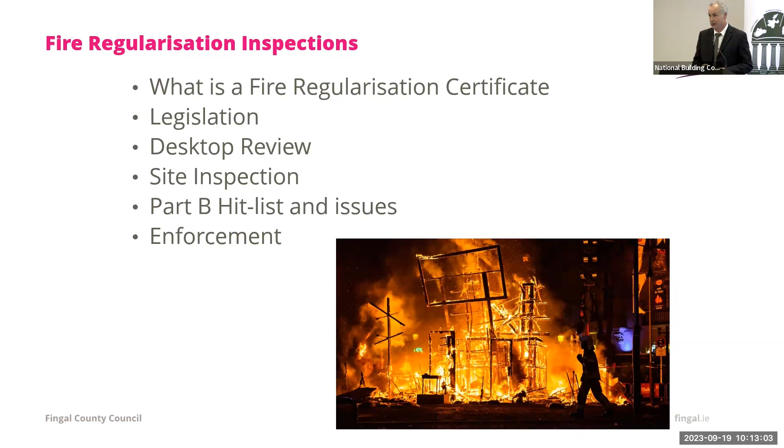What I'm going to go through today: I'm going to talk a little bit about what a fire regularisation is. I'm going to touch on the legislation, because the legislation underpins everything. With every inspection, we generally do our desktop review, then we do the site inspection. I'm going to throw up a few Part B issues that we've seen during fire regularisation inspections, and talk a little bit about enforcement.

Is fire safety important? Yes, fire safety is really important. This is probably one of the more recent big fire kills, in South Africa, and it was only there at the end of August. So, 70 people were killed in that fire. There were more than 200 people in the building. It can happen at any time.

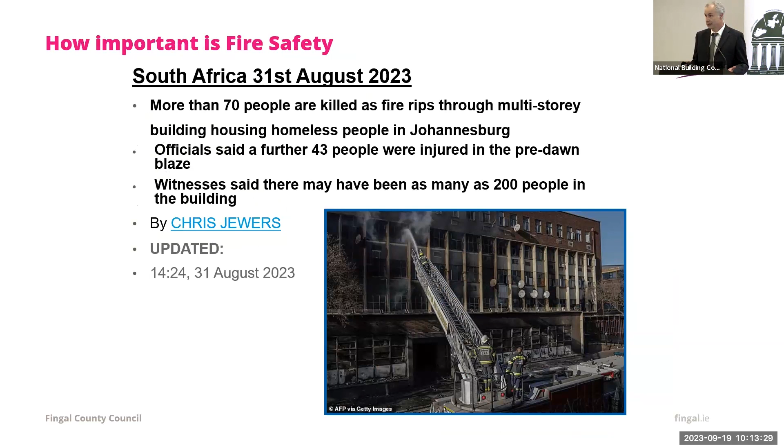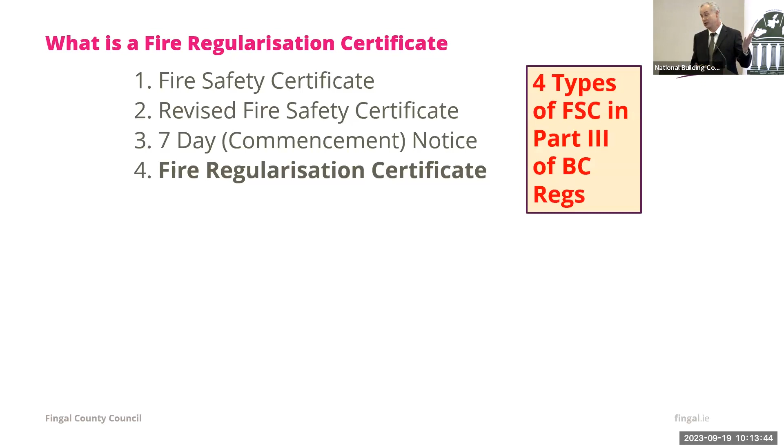So the buildings must comply with Part B. There's 4 different fire certs mentioned - well, there's actually only 3. There's 4 mentioned under Part 3, but the 7-day notice is a commencement notice. So really that's just a commencement notice saying that we want to start in 7 days and we've already submitted our fire cert. So there's only really 3.

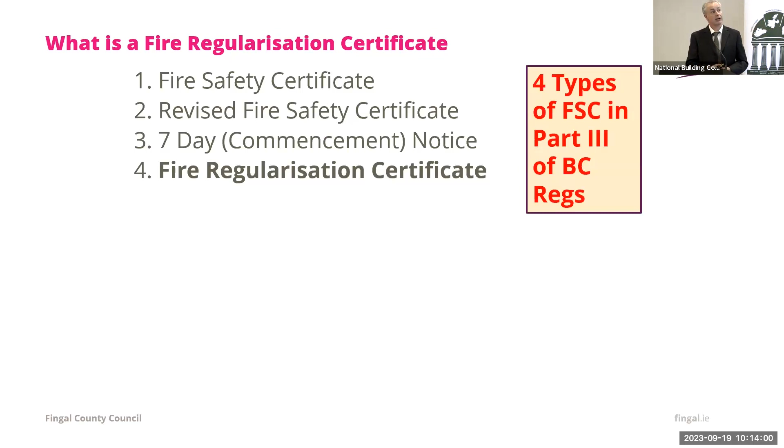There's the fire safety certificate, the normal one; the revised one, where something changed and you need to get a revised certificate; and then the fire regularisation certificate, which is granted by the Building Control Authority in respect to works on non-domestic buildings and apartment blocks which were commenced or completed without the necessary fire safety certification. And with every fire safety cert, it's granted with conditions, or refused.

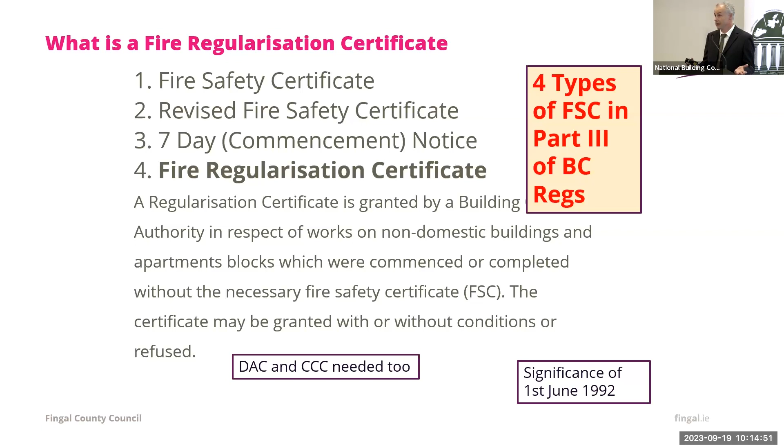Just as an aide-memoire for me - obviously every building needs a DAC, and every building should run through BCAR as well. And everybody knows this, but just to reiterate it: the legislation came in on the 1st of June 1992 for fire safety certs. Fire regularisations came in in 2009, but anything built before 1992 does not have a fire safety cert. So in reality, anything built before 1992 that needs a fire cert would have to go through the fire regularisation process.

Just a quick note on the general legislation: fire safety certs only look at Part B. So that's it, Part B only. We don't look at anything else as part of a fire safety cert.

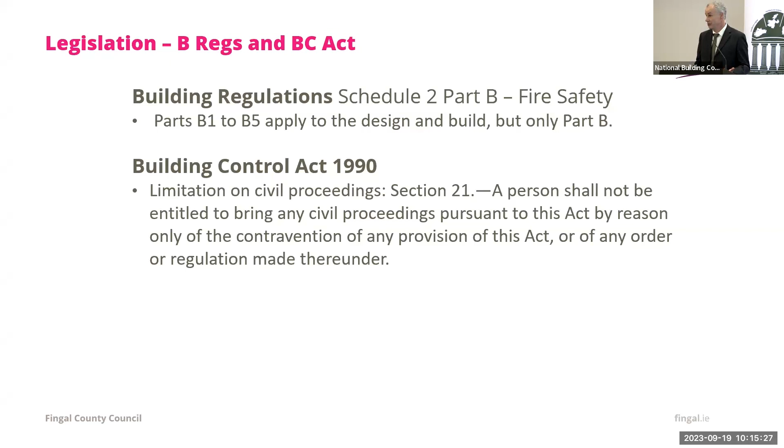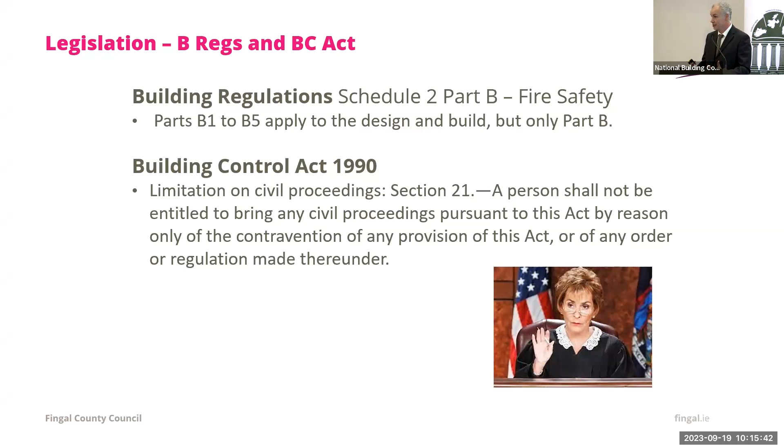I threw up Section 21, which is the limitation of prosecution against the local authorities. Basically, you can't be prosecuted under the Building Control Act for the work you do as part of a Building Control Authority. It's never been tested in court, but I don't want to be sitting in front of Judge Judy arguing the case - the legislation is written to protect us so that we can assess fire safety applications, carry out the inspection, and give our best advice with our best ability.

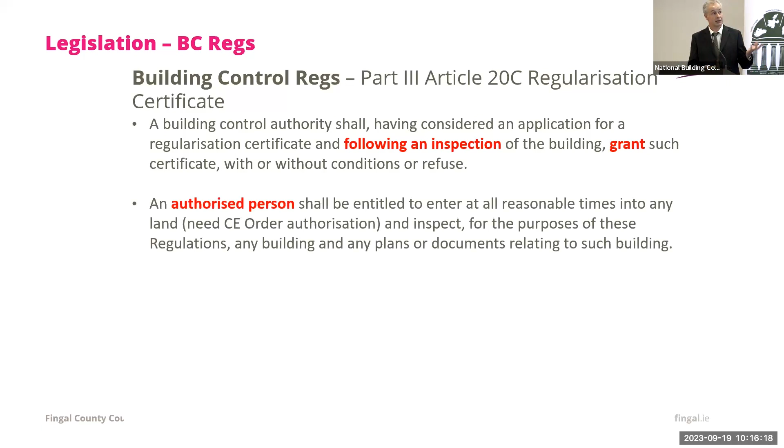The actual regs - drilling down into the regs in Part 3 - this is what it says about fire regularisations: following an inspection. Every fire regularisation needs an inspection. The legislation says it: following an inspection, the Building Control Authority can grant with or without conditions, or refuse. It's the inspection. And when the Building Control legislation says 'authorised person,' they mean the authorised person under Section 11. So that is the authorised person that carries out the inspection - you have to be authorised under Section 11.

The regularisation certificate granted on this basis says - in the opinion, which is a term that was used before BCAR - in the opinion of the Building Control Authority, the works will comply with Part B. So the design is assessed normally by the competent building control people, and then you carry out an inspection, and in the opinion of the building control officer, the design and the works comply with Part B.

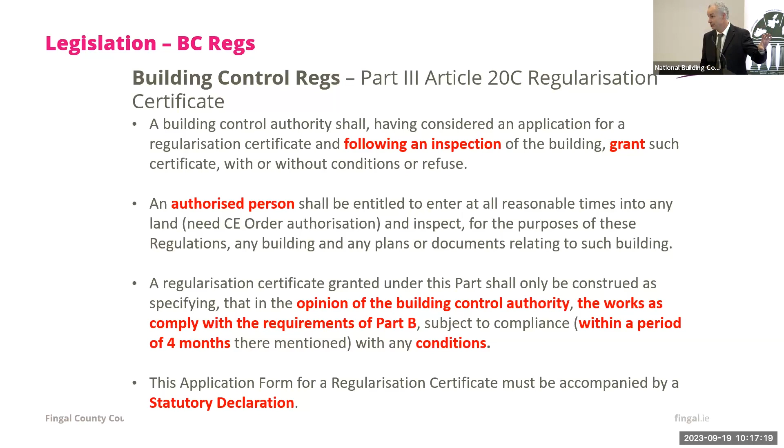If you put conditions on a fire regularisation, there's 4 months for the owner to comply. They have to comply within 4 months. If they don't comply within 4 months, the fire cert is no longer valid. Now that's quite stark, and it puts a lot of onus on the Building Control Authority. But every fire regularisation comes in with a statutory declaration, and the statutory declaration puts an awful lot of responsibility on the building owner.

They solemnly swear that the documents and information, as the building is constructed or the works carried out, are true and fully in compliance with Part B. So they're saying that the drawings they gave you and the works that were carried out are in full compliance with Part B. They've sworn it.

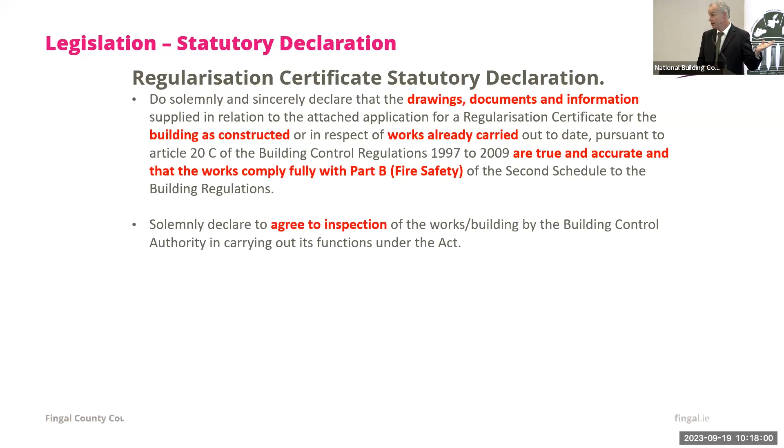They've signed the statutory declaration. You're talking about the Criminal Justice Act by falsely signing a statutory declaration. So you're into a whole new area at that stage. They solemnly agree to allow you to do the inspection, so they can't refuse. If they refuse to do the inspection, it's a breach of building control.

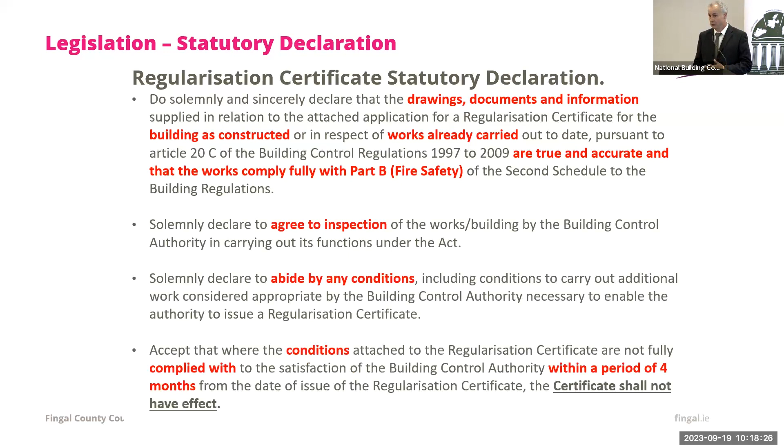And it's a breach of the Criminal Justice Act. They solemnly declare that they will abide by any conditions, whatever condition we put on it, and accept that the conditions put on it have to be complied with within 4 months, otherwise the certificate will no longer be valid. So the legislation is quite strong on this, and it puts an awful lot of onus on the builder and the owner.

Like I said, fire regularisations, every fire safety certificate, only looks at B0 to B5 really, because there's bits in B0 as well.

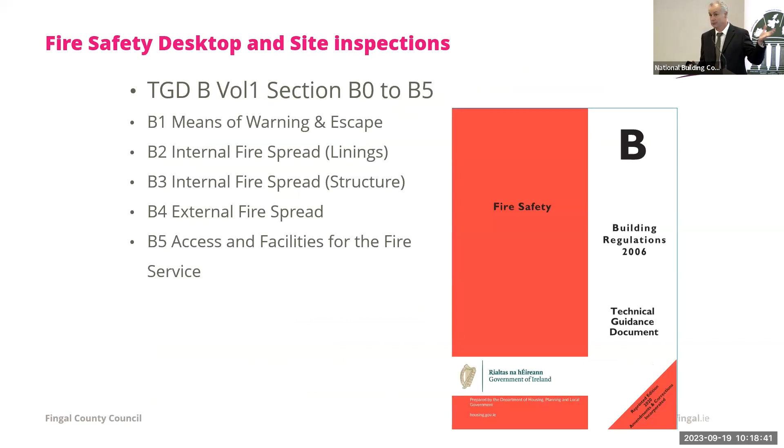What should an application include? Now, as part of the desktop assessment, there is information that will come into you, and the legislation says this is the information that must come into you. So it must be enough information to enable the Building Control Authority to assess whether said works will comply with Part B.

So you should have, through the assessment process where the fire safety certificate has been assessed and deemed that the drawings and the compliance report are in compliance with Part B, you should have an awful lot of information. So when you come to do the desktop review, you have all this information.

So you have the completed application for the fire safety certificate, which gives you contact details. You have the plans and the drawings. You have the compliance report. So you have all the information which shows how this building complies with Part B.

You have the particulars of the nature and extent of the proposed building, or the proposed use, or the proposed change of use. The fee is not important for us - we have a job to do, it doesn't matter to us about the fee. By the way, the fee is 4 times the normal fire safety cert.

And the person that carried out the assessment will or may have already put in conditions that will be applicable on this, so you have the conditions. For Fingal County Council, Dublin Fire Brigade carry out the actual assessment, and if they come across concerns, they will put conditions in based on their assessment. If there's a lot of conditions in, you can be sure they had concerns about that particular builder.

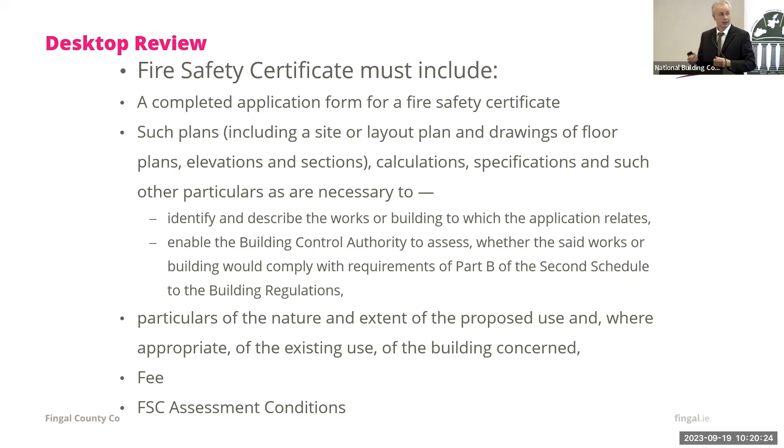So what do you get? The application form, the drawings which show how it complies, and the compliance report - a very important document. The compliance report will match, or should match, Part B, and you can see through it how this matches up with Part B. You'll also get the recommended conditions as part of the fire safety cert assessment, from whoever carried out that assessment.

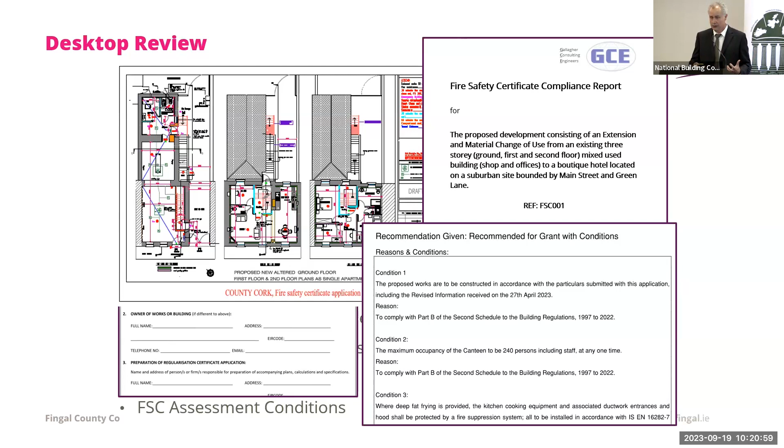So you're going to site with a lot of information already. If you have a look at this before you go to site, you have a lot of information in your head. Then you go to site for the actual inspection. Now, I've made this very simple, but I'm going to talk about it in more detail. Really, it is simple: you contact the consultant, arrange to go to site, meet the consultant on site, and carry out your inspection.

Based on your inspection, you have 4 choices. You can tell the consultant, the builder, the assigned certifier, or the owner, depending on who you meet - generally it's the assigned certifier or the consultant that did the fire safety cert - that they need to fix anything you find on site, and that you'll come back again.

And that will mean extensions of time. It will mean a second visit, third visit. It's laborious. It's the way we do it in Fingal a lot of the time, whether it's because we don't trust them, or generally if there's small works to be done, just get the works done and we'll come back and check it again.

The second thing is the building is perfect. Everything matches the drawings, everything seems to comply with Part B. Happy days - grant with the fire safety conditions, the conditions that the person who assessed the fire safety cert put in.

Just grant with those. Third one, we could grant with the assessed fire safety conditions and any other conditions that came from our site inspection. So, you know, the door didn't have intumescent seals, or we had a question mark about certification on a particular product - we can build that into the conditions. We can say that all doors must comply with Part B and they have 4 months to get that right, and then we can carry out another inspection on that basis.

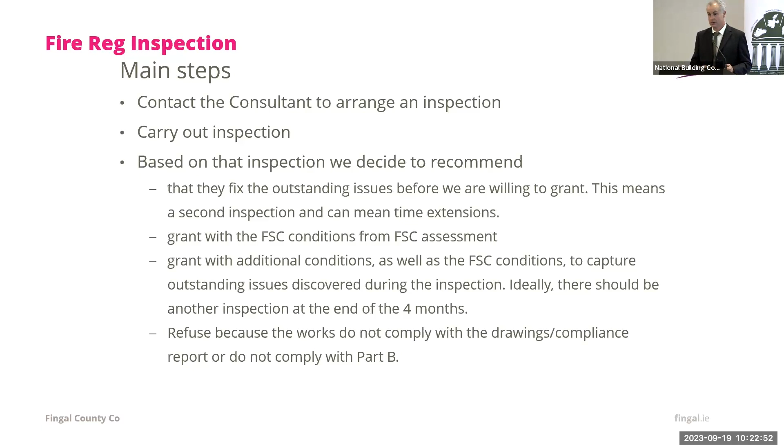And refuse. So obviously, if we refuse, we refuse. If it's not compliant and there's no way to get it compliant, it'll be a refusal.

So the actual inspection - like I said, have your data, do your desktop review, have your drawings, have your compliance report. Bring a camera, simple, bring a camera. Most people have tablets now - like Mairead said, my guys have tablets - so the camera is already built in.

You might have to request documentation during an inspection. For example, if the drawings don't show where the smoke detectors are meant to be, you ask for the commissioning cert for your fire detection and smoke alarm. Simple as that - you could ask that during the inspection. We're entitled under Section 11 to ask for any documentation to show compliance.

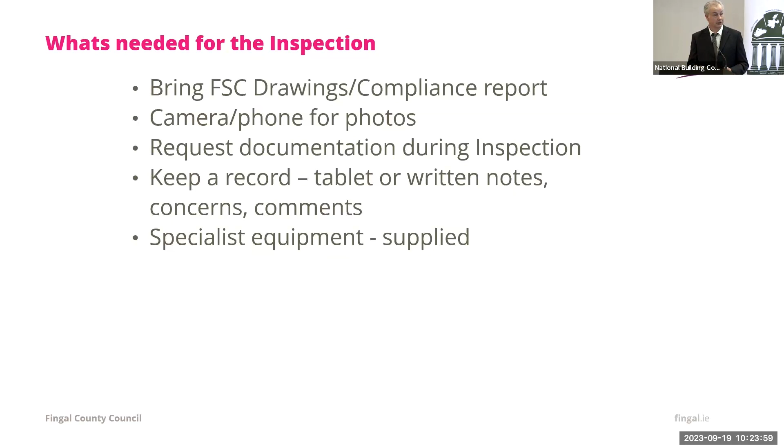Keep a record, obviously keep notes as you're going through. Specialist equipment - you shouldn't need specialist equipment, unless you're going to get them to turn on the emergency lighting and check the luminance of that. But you shouldn't need special equipment, and if you do, it should be supplied by the consultant. If you need to get a ladder to go up and see something, it should be supplied.

I did an interview about 2 years ago, and I had an architectural technologist on the other side of the table who was working in the business for 30 years and said he never saw a building control inspector on site. I was shocked. They probably were on site, probably on lots of his sites, but nobody knew we were the building control officer. So I would highly recommend getting a vest that's marked - it brings professionalism into it, it brings it up that level.

I always bring the red book with me. Sometimes they would laugh when I walk in with the red book, but when the row breaks out, I give them the red book and say, show me how that complies.

When do you terminate an inspection? Well, if the works aren't done, you can finish the inspection and find all the works that are not done, or if you walk in the door and the very first thing is works non-compliant, you can walk straight out that door and say, get it right.

The consultant hasn't visited the site - the builder told them it was all finished, and they took the builder's word. No show, consultant doesn't turn up - that's awkward enough. Whether that's refusing you entry or not, I don't know, but generally it's a mistake.

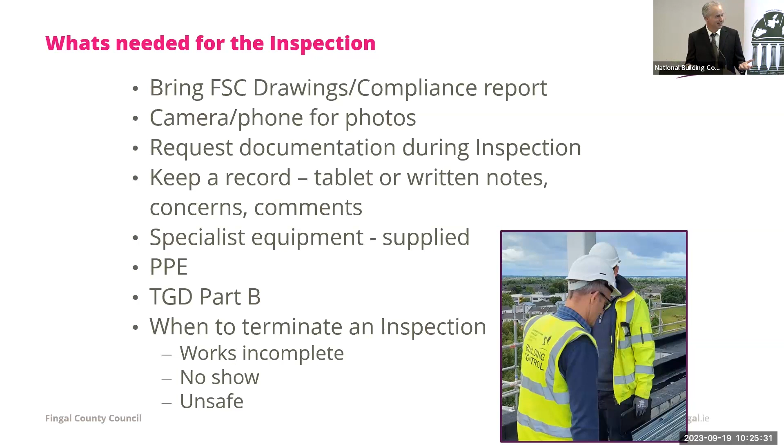The building is unsafe. Obviously, don't go into a building that's unsafe.

Okay, the actual inspection - what do you come across, what do you look at? Fire doors, big one, always trouble, particularly in older buildings, very difficult with older buildings. But look for the basics - make sure it's not lockable.

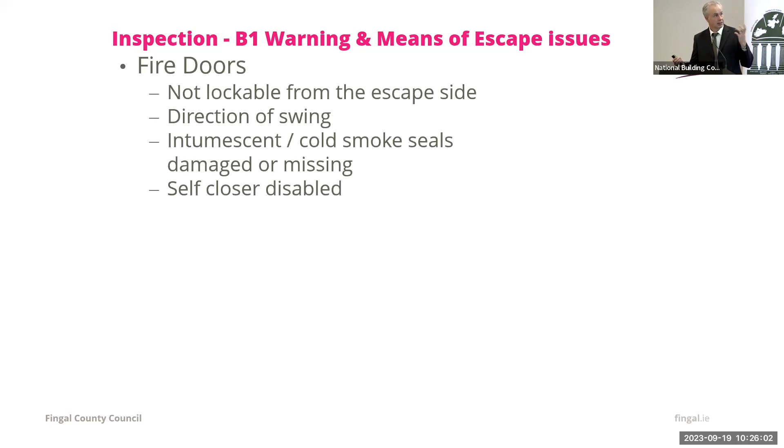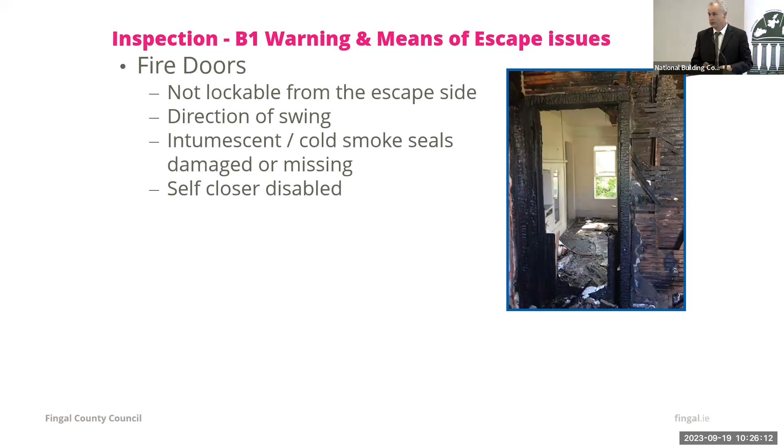Direction of swing, intumescent strip, and the smoke seal if it needs one. Self-closer device, is it working? There's a door that actually worked - the only mess inside is Dublin Fire Brigade carrying stuff on their boots when they went in. It works, fire doors work really well. There's a fire door that's not going to work unless you have the key, which is not a very good fire door.

What are you looking for? It's kind of small there, but you're looking for the intumescent strips. Ideally, really all fire doors should be stamped - you can either have that stamp there or sometimes they have the little tags on top. In a new building, if you don't have a fire door that's stamped, there's something wrong.

Fire detection and alarm system, emergency lighting, sprinklers - if it's on the drawings, and it matches what's on the drawing, happy days, tick it off. If it's not on the drawings, how do you know it's in compliance? Ask for the commissioning cert. All three of these need a commissioning cert - fire detection and alarm system, emergency lighting and sprinklers.

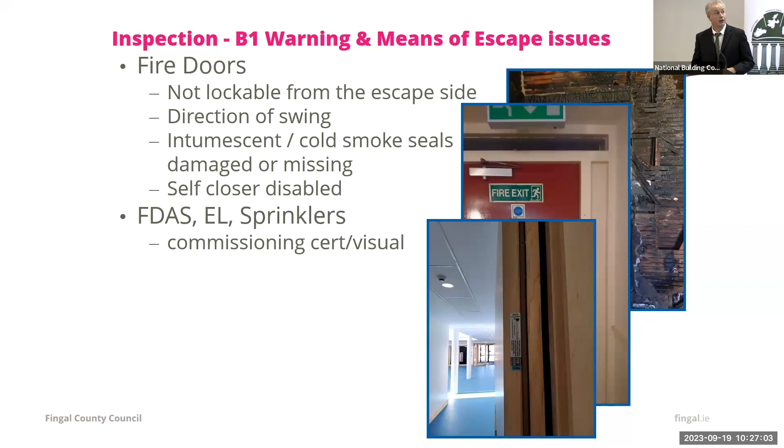So I just threw in a few pictures there.

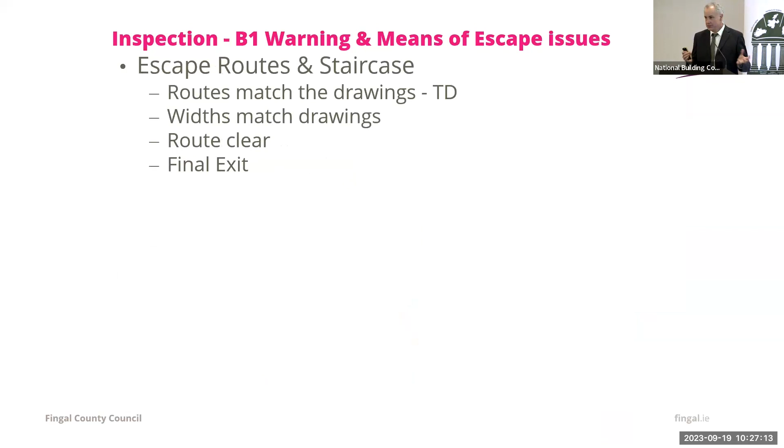Escape routes and staircases - the routes need to match the technical travel distance. If the route doesn't match the travel distances, if it's an extra 2 meters long, it may no longer be in compliance. Widths need to match what's in the compliance report and what's signed off. The routes need to be clear - it's always a bad sign if an escape route is full of stuff when you're carrying out an inspection as a building control authority.

Final exit - is the final exit exactly where it's meant to be? Is there the right number of final exits? Escape route protection - AOVs, OVs, fire dampers. I remember going to a creche and the OV wasn't in the stairwell - in fact, there was no window in the stairwell, so there was nowhere for the smoke to vent out.

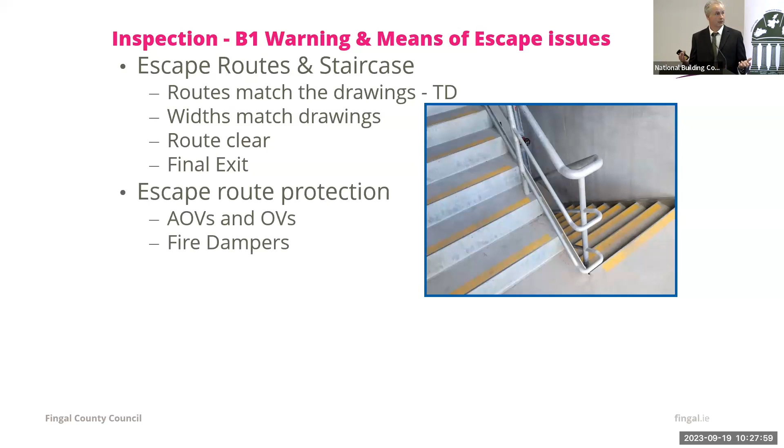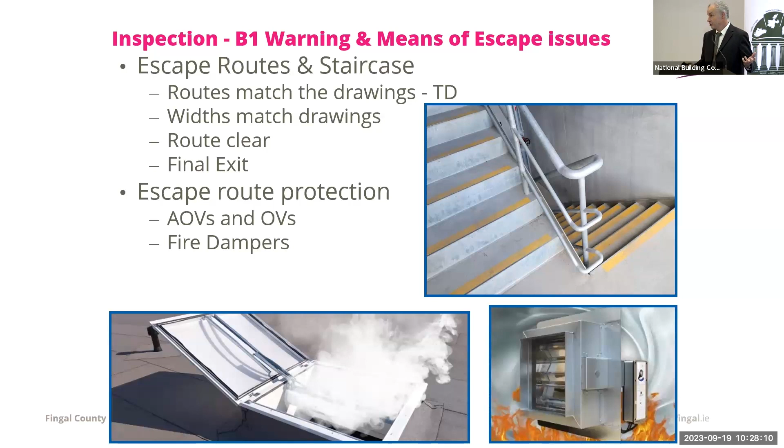An AOV, that's its purpose. A fire damper will shut down, it protects the protected corridor when a fire starts. There's just a smoke vent.

B2 - probably not an awful lot to see on site. It's really to do with the surface spread of flames - can the flame ignite the surface and move along the surface? We have come across buildings that had timber paneling on the escape route. First thing straight away: show us, prove that that's a class 0 rating. Prove it - it's the first request we'll do.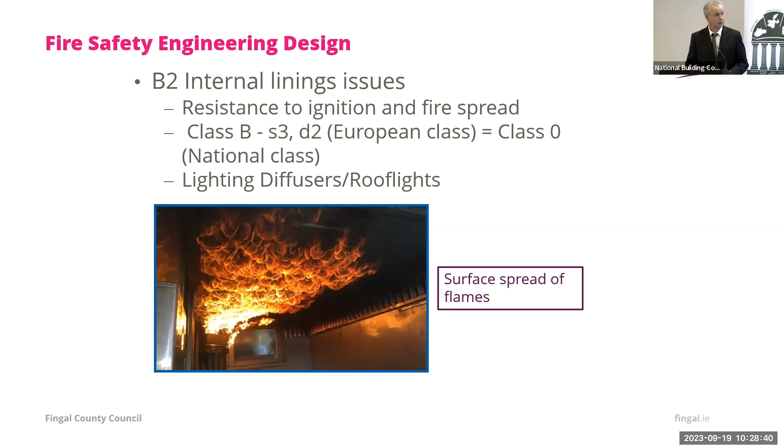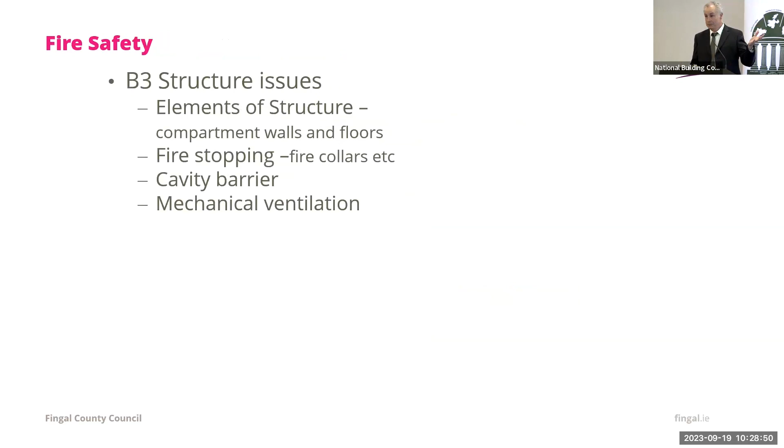B3, structure - elements of structure, is it a 60-minute, is it a 30-minute? Very hard to tell. Cavity or fire stopping, you can see it, you should be able to see it. Cavity barriers, impossible to see.

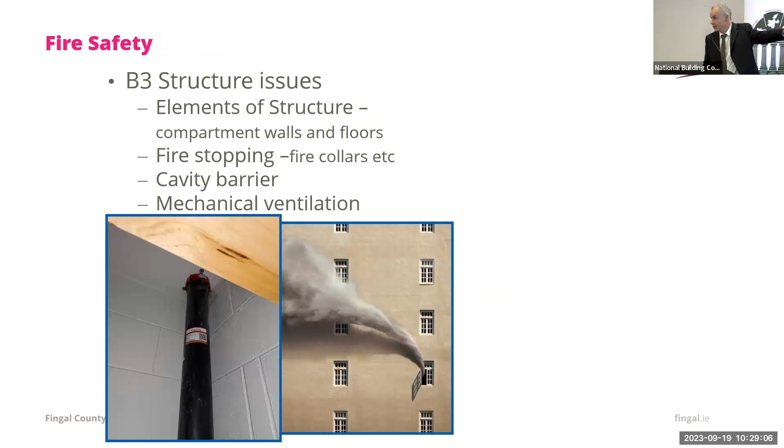Mechanical ventilation - obviously the compartment there is not working. But this is what I like: it's marked off, there's a fire collar on the pipe, and it's signed off by a competent person to say this is installed correctly. Lovely - when you see that, you just breathe a sigh of relief. Same here, all signed off by somebody who says this is installed correctly. It's just a breath of fresh air when you see things like that.

Here we have a 60-minute wall, and the owner of this building, this is his office, he wanted to see the workers on the floor, so he insisted that they put in a normal window. And the fire safety certifier said, well, the client wanted it - like, there's no longer a 60-minute wall. He had to take out the window and put back in a 60-minute wall.

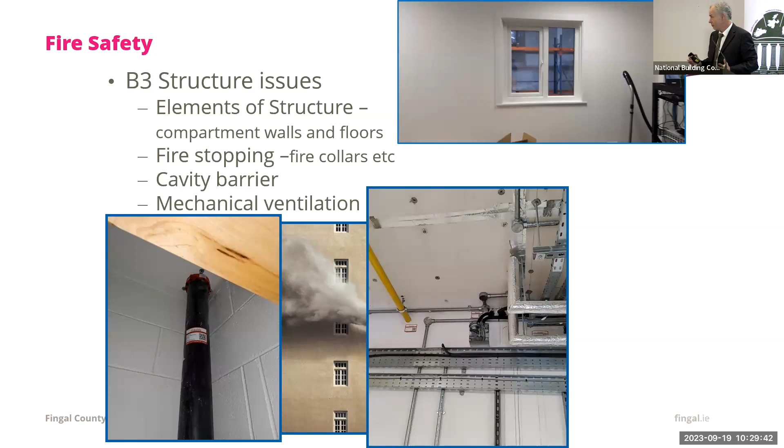And you get that far more than you should - 'the client wanted it.' Hang on a second, it has to comply. Tell the client that it won't comply. No, they let the building control authority tell the client it won't comply. And that's not on, that's just playing a game.

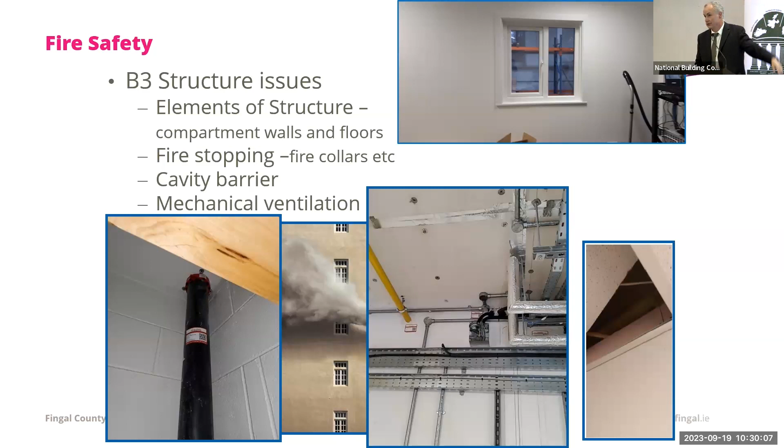Here it was a dodgy building, we were a bit worried about it. The cavity did not go the whole way up, so basically the wall stopped there and there was a clear run right through the attic. So obviously this building was generating a lot of concern for us.

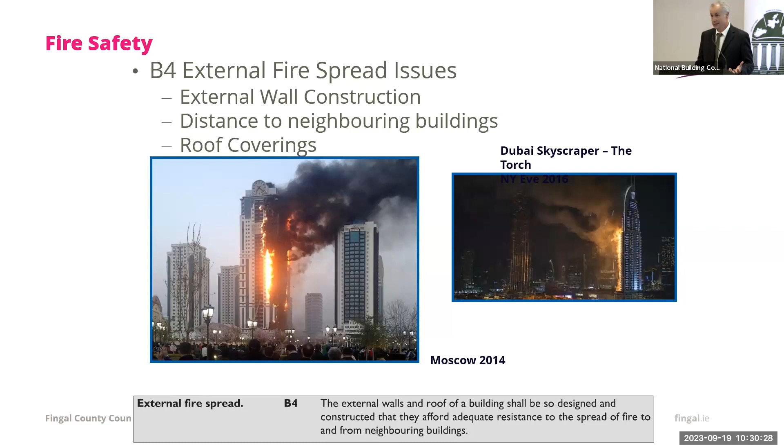B4, it's mainly distance to the neighboring building. It's spectacular when B4 goes wrong, but not something that we should really pick up on in an inspection. There shouldn't be anything wrong unless it's too close to the neighboring building and doesn't comply with what was in the fire cert.

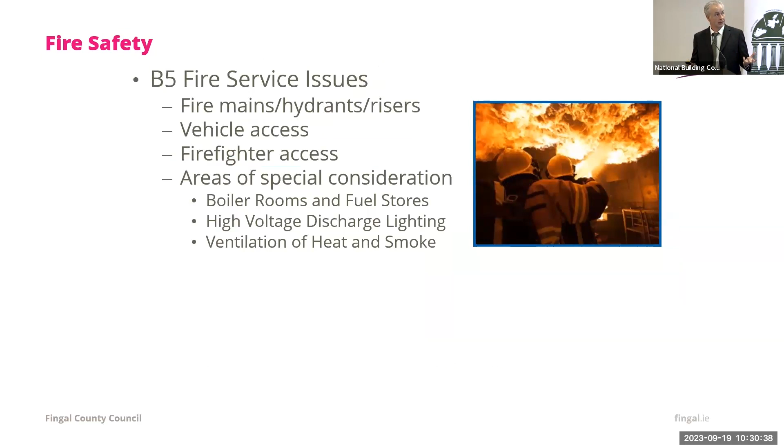And then B5, this comes up quite a bit, the fire mains, the risers, vehicle access, firefighter access, and remember B5 has the three little unusuals in there as well. If they're in the building, they need to be addressed. Dublin Fire Brigade aren't going to thank us if they can't get down to actually put out the fire.

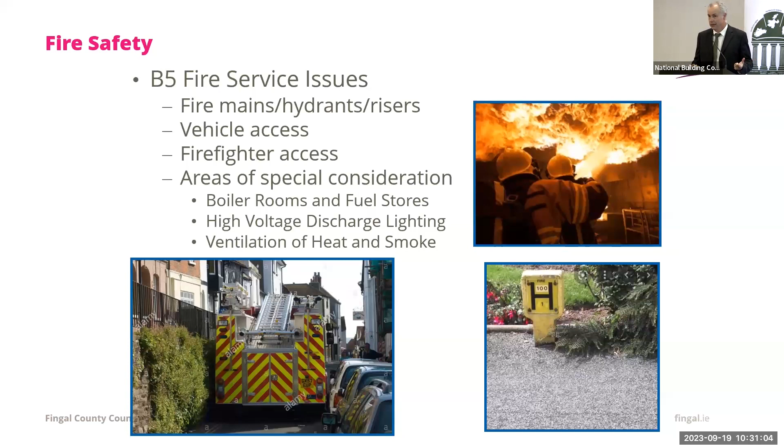And then here's a hydrant. The marker's there, the hydrant's been buried. So the new surface went in and they never uncovered the hydrant. They're simple things, but when we're doing the inspection, they're things that we come across.

The concerns with the fire regs - there is a concern out there that fire regs are being used in lieu of CCCs, in lieu of completion certs. There should be no reason now for fire regulations. There should be no reason.

The 1992 legislation was when it was brought in for fire safety certs. We're a long way after 1992, 31 years, and still we're doing fire regulations. The only fire regulations we should be doing are the ones pre-1992. And in all fairness, maybe there should be a year or two given for the remaining ones that are pre-1992, and then scrap fire regulations. There's far too many of them.

Being submitted - how did they get that far? Maybe there are undercurrents, maybe there are drivers, maybe it's cheaper, maybe insurance companies are happy with a fire regularization even though it hasn't gone through the BCAR process. I don't know, but it's not a good practice. It's something that may be out there.

There is still fire regs coming in every year. Here's Fingal, so you can see we're getting the guts of 20 a year. How are we getting 20 fire regs every year? How is that possible? And they're not old buildings, they're all fairly new buildings. It shouldn't be happening.

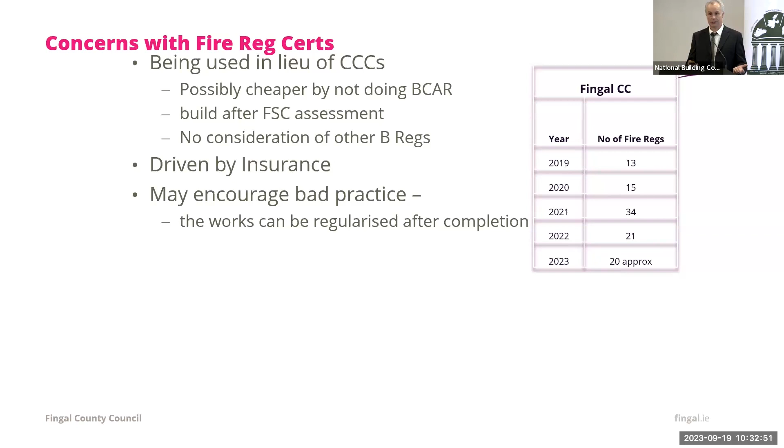Maybe insurance are driving it. Maybe it's, we won't give insurance unless you have a fire cert. Maybe they didn't bother with the fire cert when they're building a building, the insurance won't cover it, so now they have to get a fire regularization cert. Maybe it encourages bad practice - you can build it whatever way you want, we'll just regularize it afterwards. Maybe that's coming into the game.

Maybe there's comfort in the Building Control Authority signing off. The Building Control Authority carries out an inspection, so Building Authority is sending in resources. Imagine if we only did fire reg certs - Fingal would have probably 250 fire reg certs a year. The resources required to inspect all of those and then repeat inspections would be colossal.

And how much can be assessed in a single inspection? We're going in, it's an opinion of compliance, we're going in after it. There's very little we can see, and shockingly, the building control team of Fingal do often find an awful lot wrong. These are meant to be checked by the consultant, meant to be signed off. They signed a statutory declaration saying that this building complies with Part B, and we go in and 8 times out of 10 there's something wrong.

And that shouldn't be the case. Just the fire regularization cert only looks at the fire regs. Now, if any of my team are in there and they spot a Part M non-compliance or something like that, well, that's a Section 11. If we're still within the 5 years, it's a Section 11 and shows how you're going to comply with Part M. But the fire cert is only to do with the fire regs.

I did mention this, so older buildings, pre-1992 buildings, don't have a fire cert. So yes, it makes sense - a fire regularization might be the only way they can get a fire cert if they need it for insurance.

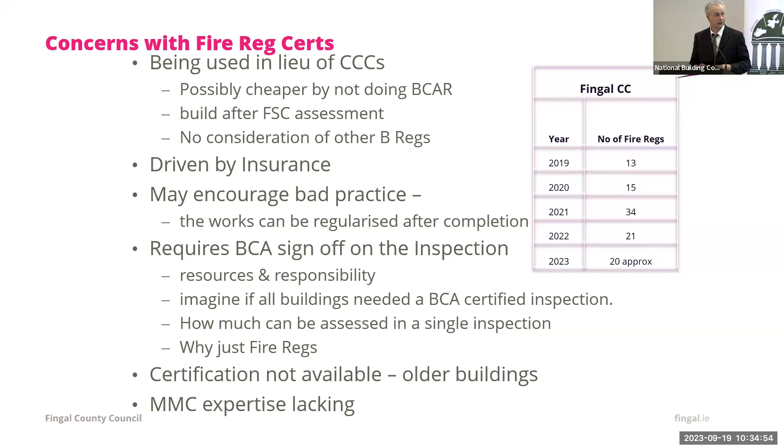And I mentioned this at the beginning, why do we still have fire regularization? If you follow the law, you don't need fire regularization, because it's an offense to start works without a fire safety cert. It's an offense. So how do we get to where we need a fire regularization? The only time you can start work without a fire safety cert is a 7-day notice. And in a 7-day notice, you've already submitted a normal or revised fire safety cert.

If you don't comply with the conditions, it's not a valid fire safety cert. If you lie on a statutory declaration, it's a breach, it's an offence under the Criminal Justice Act. So you've even gone beyond the Building Control Act. And it says in the legislation, you cannot open, operate or occupy without a granted fire safety cert. The amount of fire reg inspections we do where the building is buzzing - you just wonder how much adherence to the legislation they're actually giving.

On enforcement, what actions do you have? Straight away - and I probably should have done these the other way around - if you don't have a fire safety cert, you're not complying with the building control regulations, so straight away you can go to court. Also, if you don't have a fire safety cert, in all likelihood you haven't demonstrated compliance with Part B, and probably are not in compliance with Part B. So that opens the door for an enforcement notice under the Building Control Act as well. So you could hit with 2 non-compliances here.

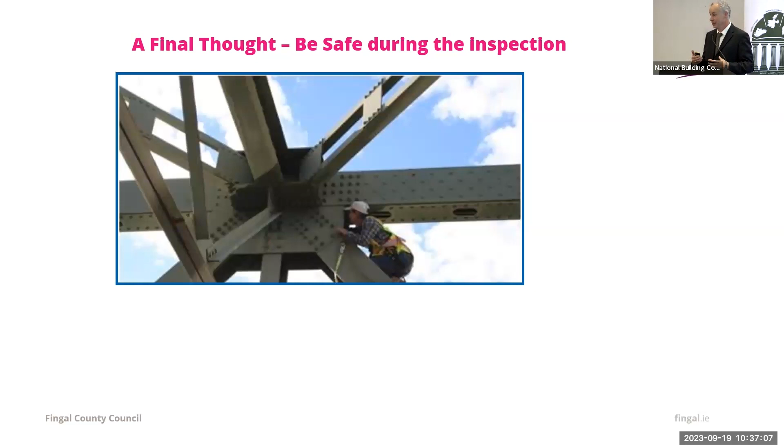Final thought, and this is the last slide. So for the actual people in building control who are doing the inspections, don't go climbing into really weird places or awkward places. You're there as the building control officer. Your safety is the most important concern for the building control authority. If there's something that needs to be inspected at a very high level, tell the consultant to organise it and you'll come back. Don't go inspecting a building that doesn't look very safe.

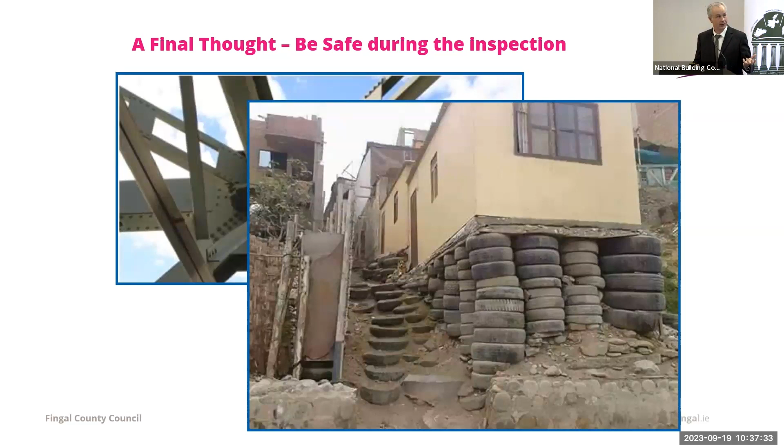You know, I think you should be looking for a certificate of compliance with Part A for this building. Maybe it's an earthquake zone and the building bounces as the earthquake happens there. And then last of all, if you're carrying out an inspection and there's a big rowdy crowd there and you're feeling a bit uncomfortable, don't do the inspection. You can walk away. You don't have to do the inspection.

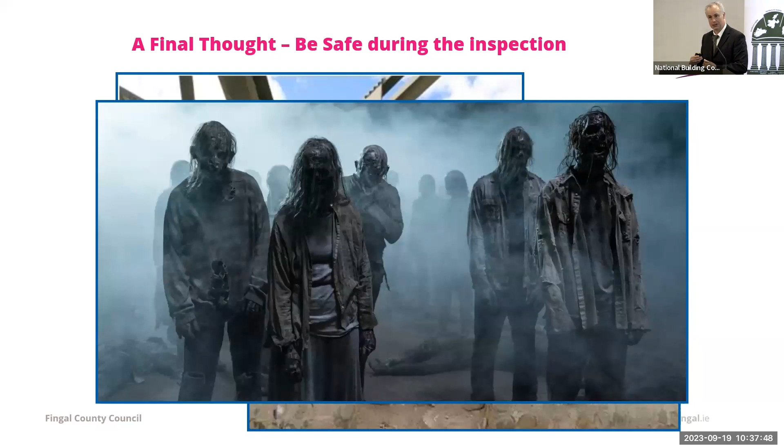All right, now that's a whistle-stop tour. I tried to create the slides so that maybe afterwards when they're sent around, people can use them to see legislation, inspection, typical things. So hopefully that's of some use to you. Thank you.